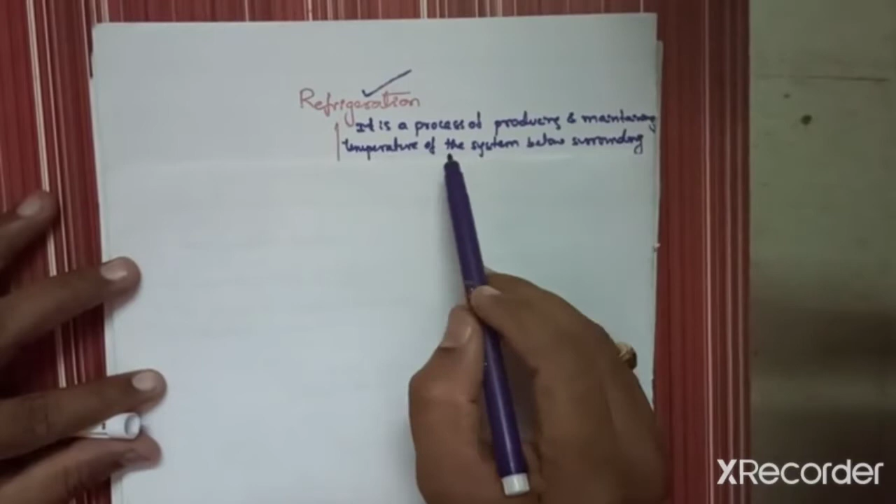That is refrigeration. In air conditioning, that is also a process of producing and maintaining the temperature of the system below the surrounding. But here the quality of air is controlled in air conditioning, and air conditioning not only maintains the temperature below the surrounding, it can increase the temperature above the surrounding, depending upon the condition of the atmospheric air.

And that is the second point. Refrigeration is not for human comfort; air conditioning is for human comfort. That is the difference between these two we discussed in the previous video lectures. So there are two types of refrigeration: one is the air refrigeration system and another one is the vapor refrigeration system.

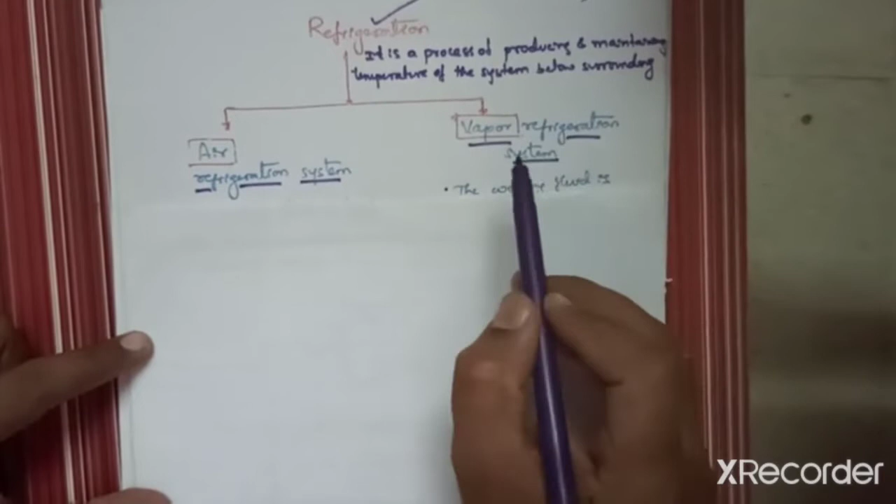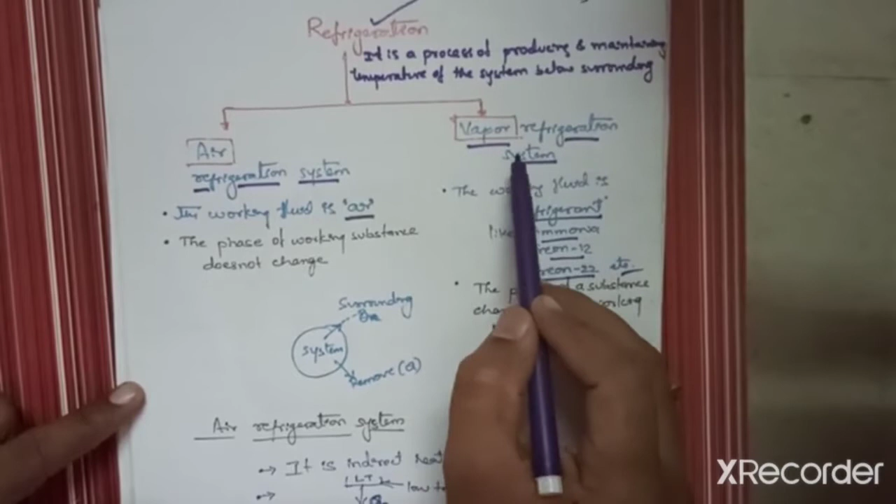The difference between these two is, in the air refrigeration system the working fluid used is air, and in the vapor refrigeration system the working fluid may be different than air, that is called refrigerant. It may be ammonia, Freon 12, Freon 22, dichlorofluoromethane, etc. Different types of refrigerants you can use in the vapor refrigeration system. The vapor refrigeration system you can use in our kitchen and in small scale industries.

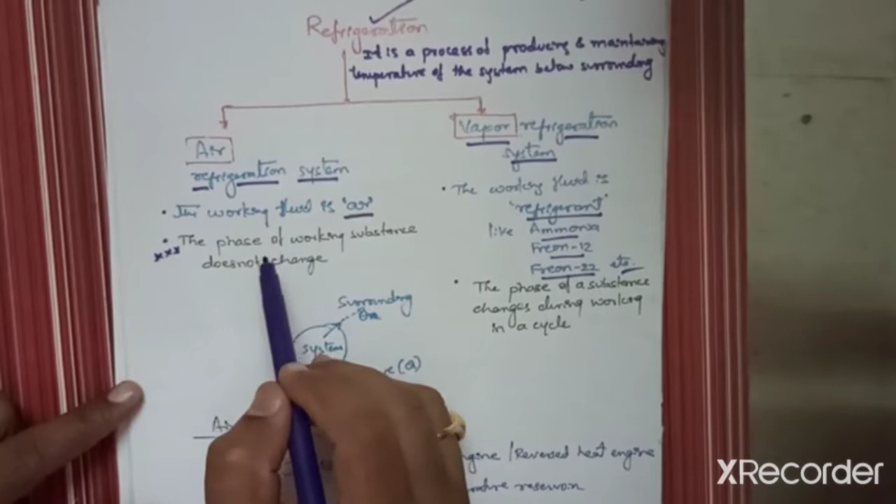The second point is a very important point. The phase of the working substance does not change in the air refrigeration system. Throughout the cycle the working fluid air has the same phase; it will not change from liquid to vapor or vapor to liquid. But in the vapor refrigeration system the phase of the refrigerant changes from one process to another, depending upon the components. So the phase of the substance changes during working in a cycle. That is the second important point.

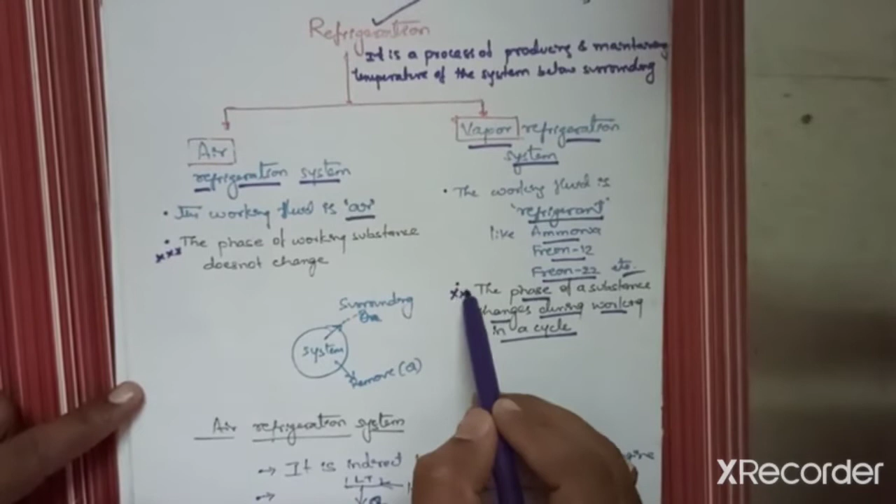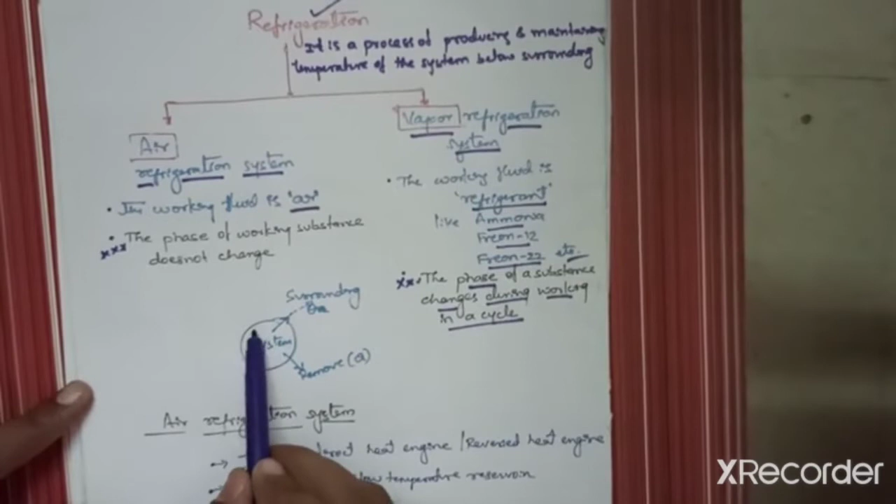So consider one system to understand refrigeration better. The temperature of the system is 30 degrees Celsius and the surrounding temperature is also 30 degrees Celsius. Now I am not comfortable with this system at 30 degrees Celsius; I need to reduce it to 25. So I need to supply some external fluid to the system, and that fluid absorbs heat from the system, or the system is rejecting heat to the surrounding, or in other words the surrounding is absorbing heat.

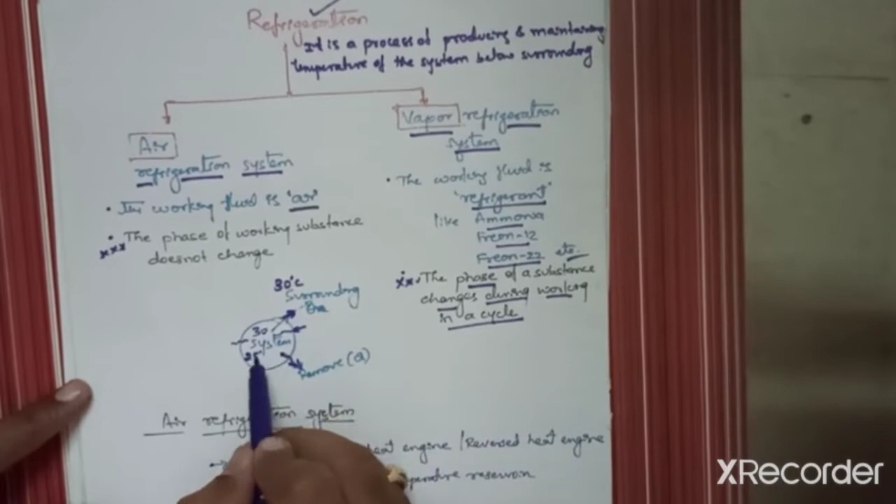When the system rejects heat to the surrounding, slowly the temperature of the system comes down from 30 to 25 degrees Celsius and maintains the same 25 degrees Celsius throughout the day. Then this process is called a refrigeration cycle or refrigeration process. Next we will discuss the air refrigeration system. The air refrigeration system is an indirect heat engine, also called a reversed heat engine.

What is an indirect heat engine? An indirect heat engine, or reversed heat engine, is an engine that absorbs heat from a low temperature reservoir and rejects heat to a high temperature reservoir with the use of some external work. So indirect heat engine absorbs heat from low temperature reservoir and rejects heat to high temperature reservoir with the use of some external work. The same application you can see here.

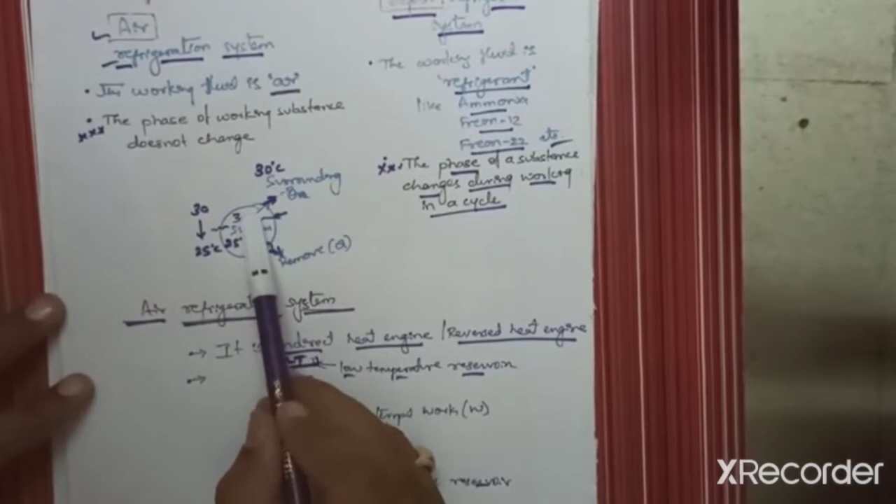Initially the system temperature and the surrounding temperature are the same, 30 and 30 degrees, for example. Now the temperature of the system is gradually decreasing by use of some external work. I am supplying some air or some external fluid, and that fluid absorbs heat from the system and rejects heat to the surrounding, producing and maintaining the low temperature.

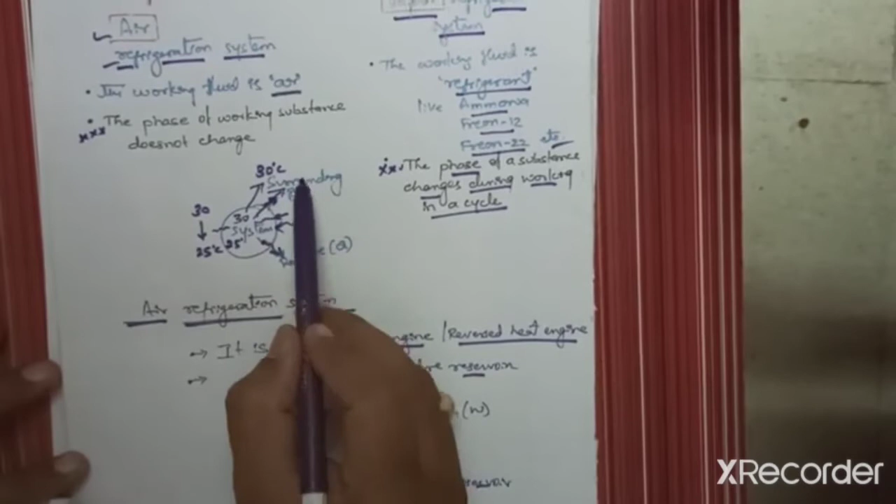So heat is absorbed from low temperature, and heat is rejected to the high temperature surrounding. The surrounding is at high temperature, the system is at low temperature. So that is how the system works. In the next topic we will consider the working of the air refrigeration system.

Okay, here I have taken a new topic, air refrigeration system working on Bell-Coleman cycle. This entire air refrigeration system works on the principle of Bell-Coleman cycle, and it is also called reversed Brayton cycle. Why it is called reverse Brayton cycle, we explained in the previous video lecture in the gas power cycle.

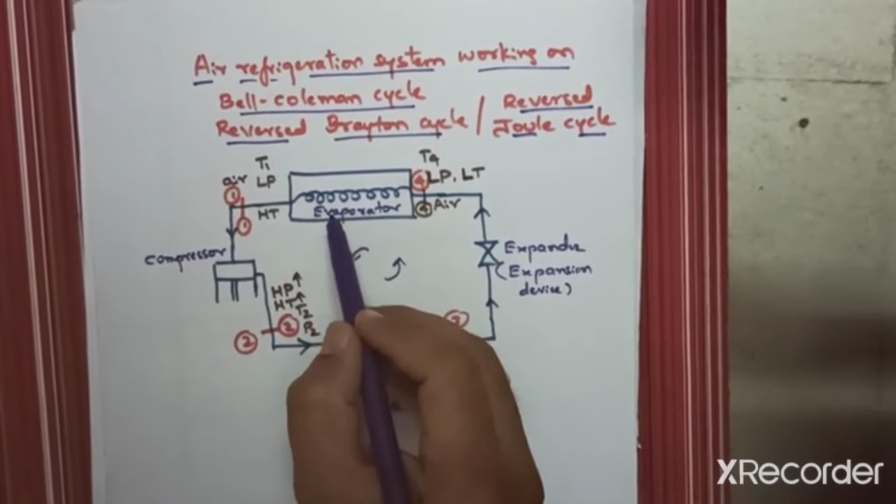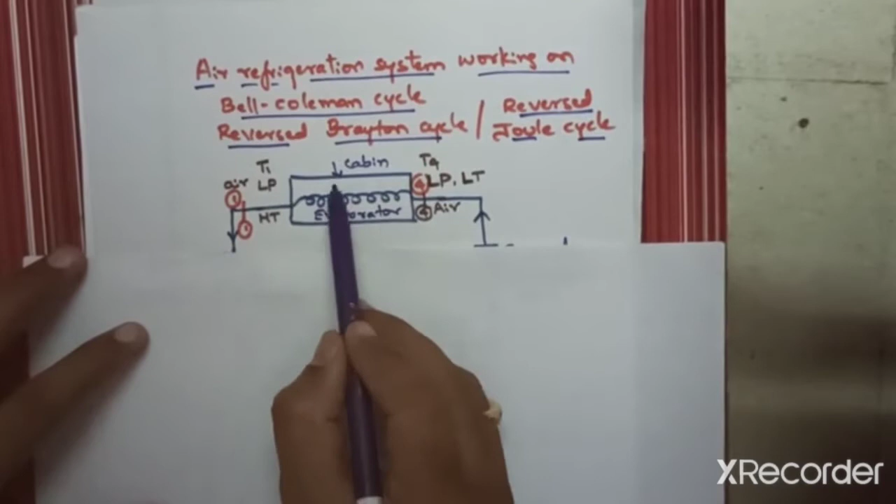Now I will discuss one by one what will happen in the evaporator, the compressor and all. First I will consider one evaporator coil, and here this is the diagram. This evaporator coil is placed in a cabin. Cabin is nothing but where you need to reduce the temperature. For example, you take one room, and inside the room you fix these evaporator coils, where you need to reduce the temperature of the system.

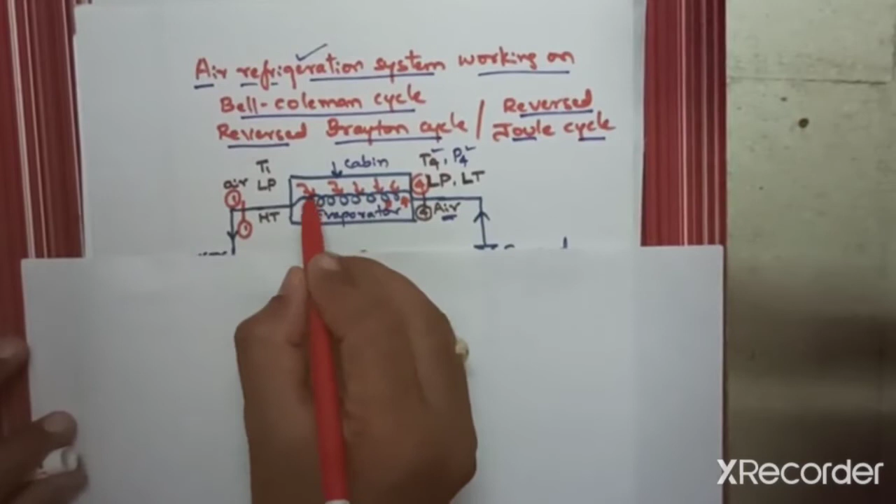Now I will supply air, because it is an air refrigeration system. I will take this as point number 4. The air is at low pressure and low temperature, T4 and P4. I supply air inside the evaporator, and this air, when passed through the evaporator coils, absorbs heat from the room, because the temperature of the air is low and the temperature of the cabin is more.

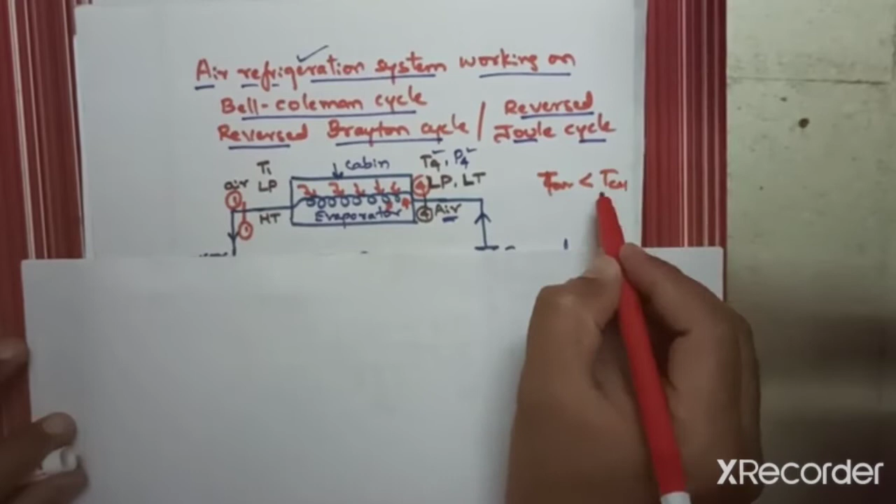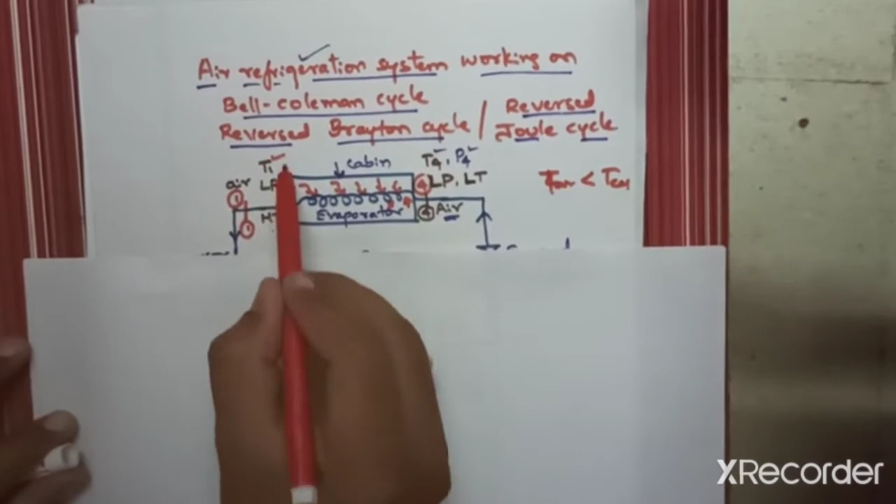There is a difference in temperature. Temperature of air is less than temperature of the cabin. So the air absorbs heat from the room to be cooled and becomes high temperature. Temperature at point 1 I will take as T1, and pressure as P1. During the evaporator, that is called heat addition process. So process 4 to 1 is heat addition process; heat is added to the air.

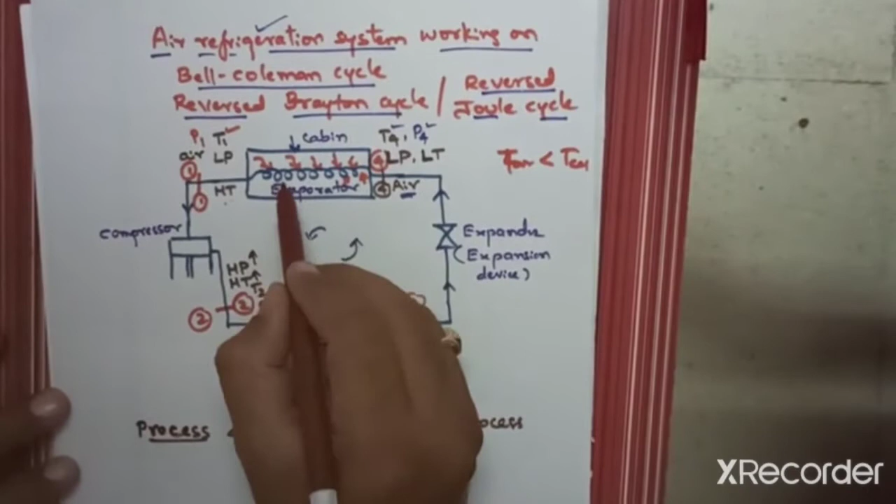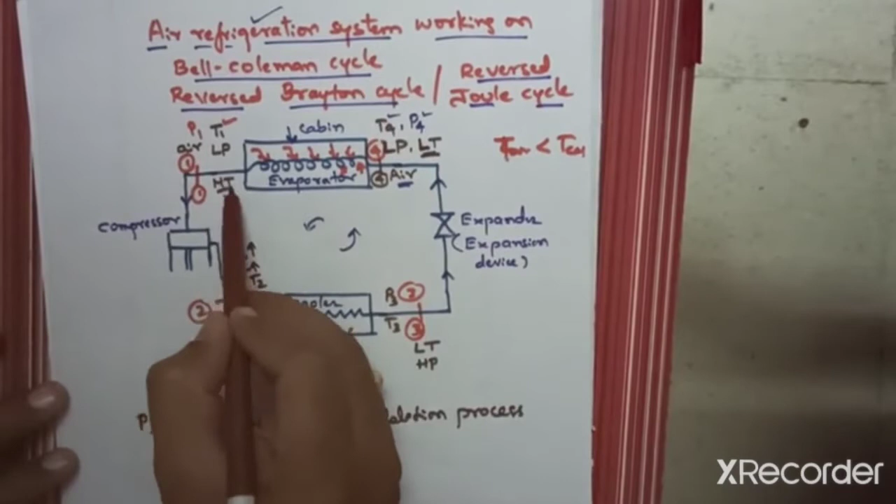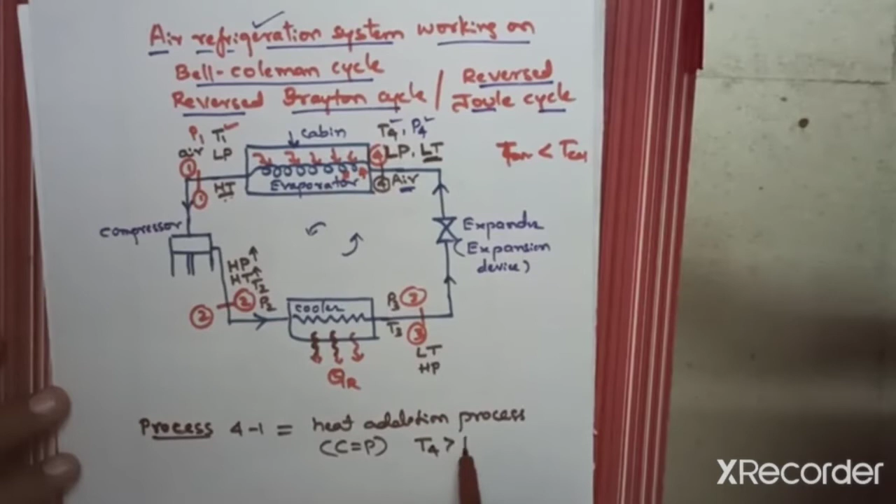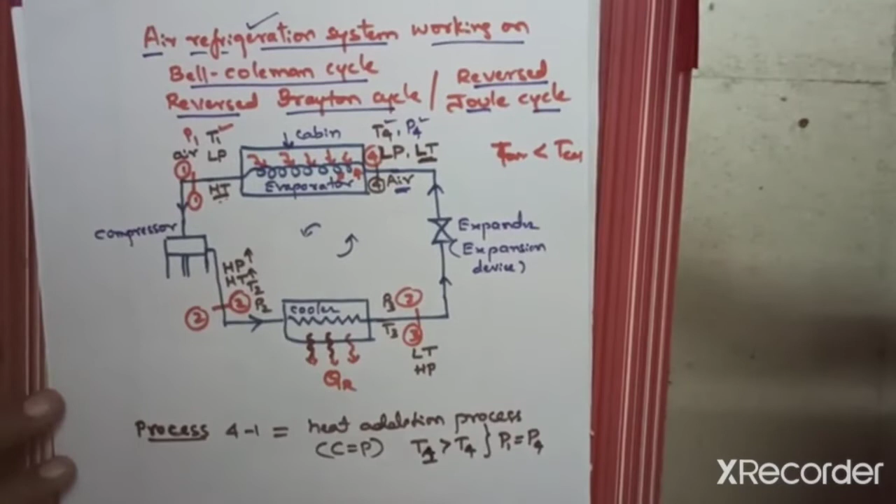During heat addition process, 4 to 1, the pressure is constant, but the temperature is increased, because air absorbed heat from the room. So temperature at point 1 will be greater than at point 4, but pressure P1 is equal to P4. One more point: when the air refrigerant absorbs heat from the space to be cooled, the volume slightly increases, so V1 will be greater than V4. These are the three conditions here.

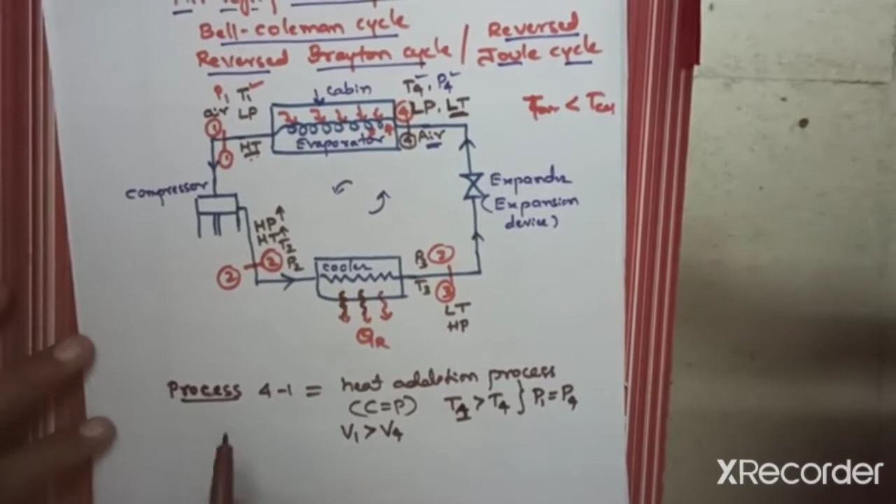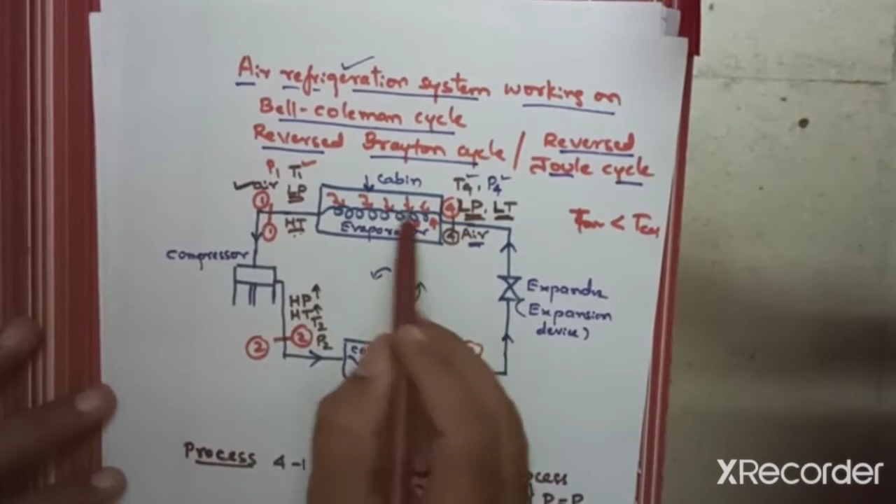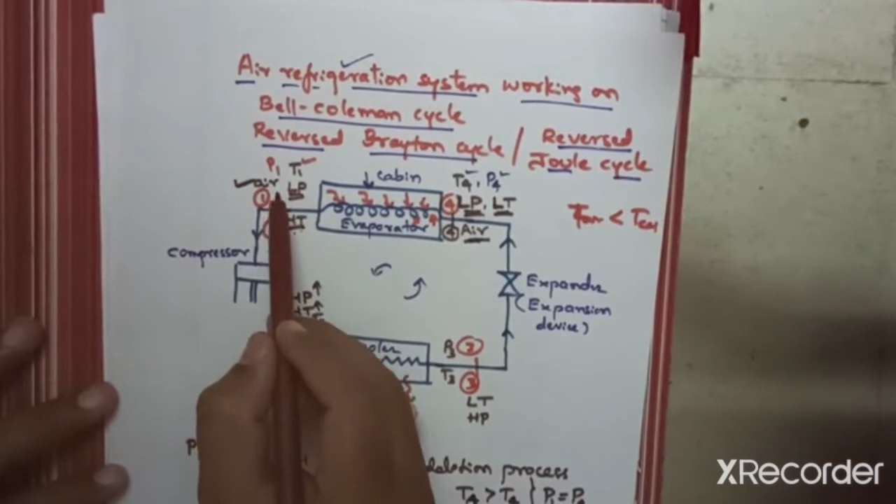Now at point number 1, the air is high temperature and low pressure, because the pressure is constant, same as point number 4. Keep in mind, there is no change in the phase of the substance; here is air, here will be air. That is a fundamental point. This high temperature, low pressure air enters inside the compressor. So why do you need the compressor here?

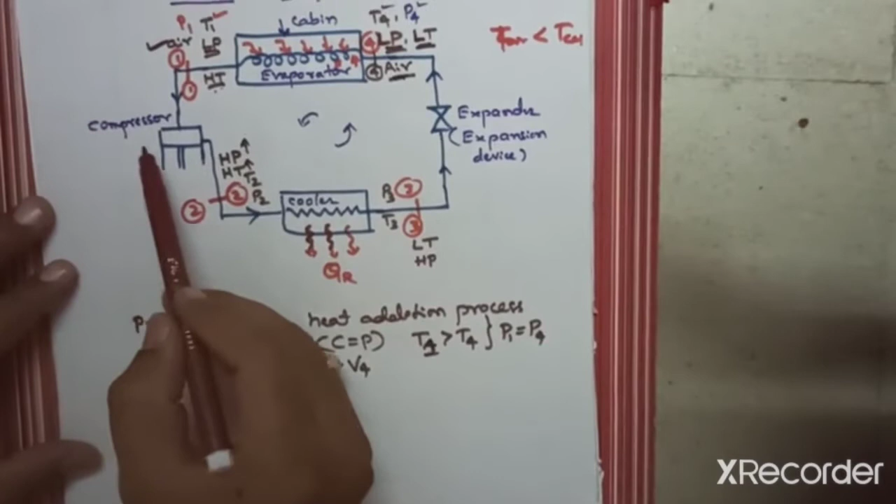As I told you, here the volume of the air is more. If you do not compress this high volume air, it will become very difficult to pump from one place to another place; we would need a larger pipe diameter. So you have to compress it to low volume. Now this high temperature, low pressure air passes to the compressor.

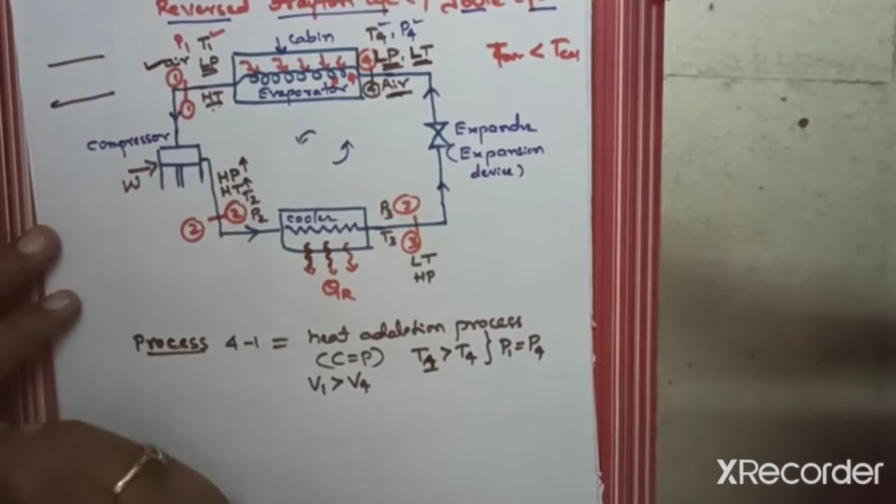In the compressor we are supplying some mechanical work W. Here the air undergoes a compression process, process 1 to 2. What type of compression is it? Isentropic compression, also called reversible adiabatic compression process.

So now during the adiabatic compression, what are the properties that will change here? So here it is high temperature air. During compression, the temperature also increases. Here I have written high temperature and high temperature. That does not mean that the temperature will remain the same. The temperature at point number 2, that is T2, will be more than T1.

Because if you compress any fluid, the pressure increases, at the same time the temperature also increases, but there is a decrease in the volume. Okay, you take a balloon and compress it, the volume of the balloon decreases, but the pressure of the air inside the balloon and temperature also slightly increase. So at point number 2, the pressure is more than P1. So P2 is more than P1, and temperature at point number 2 is also more than T1.

So that is the reason we have written here, low pressure will become high pressure after compression, and there will be a slight change in the temperature of the air. Now this high pressure, high temperature air passes to the cooler or heat exchanger. This cooler or heat exchanger will be fixed outside the room. I have taken this as the cabin. My cabin itself is the room, and this cooler will be fixed outside the room, and heat is rejected to the surrounding. This is the surrounding, this is the system.

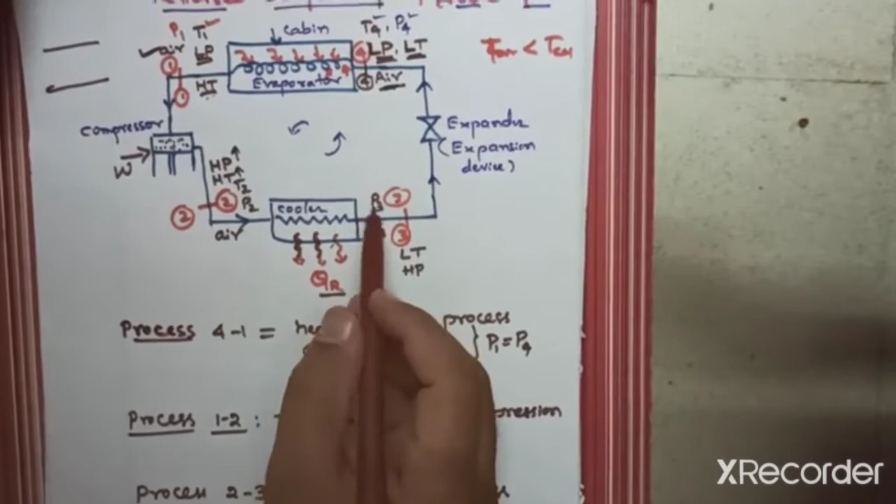So during the 2 to 3 process, heat rejection takes place. So I will write here process 2 to 3, heat rejection process. Okay. During 2 to 3, again the pressure remains constant. That is a fundamental concept of the Bell-Coleman cycle. So I will write P2 is equal to P3 because during the 2 to 3 heat rejection process, the pressure remains constant.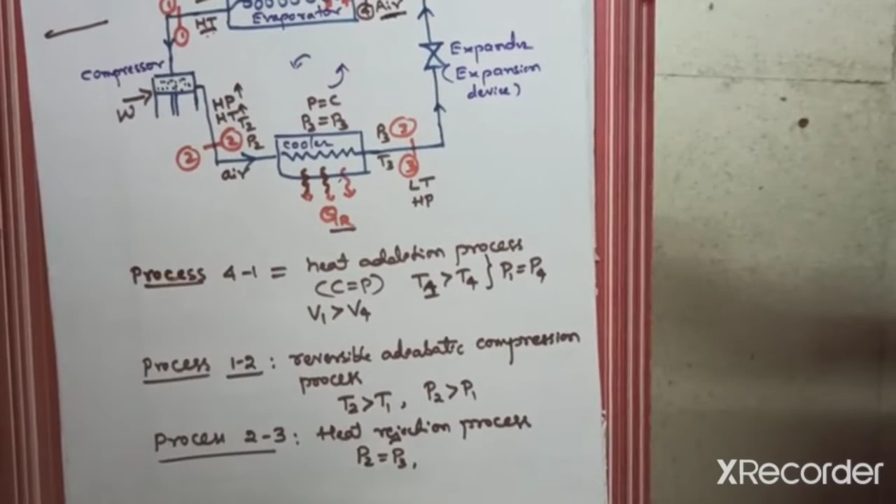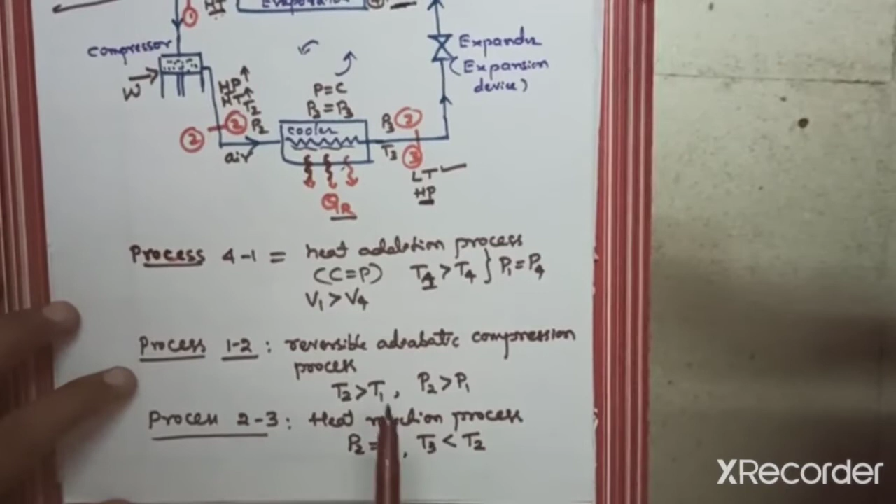Now you can ask a question, what about the temperature? When high temperature air releases its heat to the surrounding, the high temperature air becomes low temperature. So here is low temperature, but the pressure will remain the same. So at point number 3, the temperature is less. T3 is less than T2. So these are the two properties that change. The volume of the air will remain the same because we are not compressing and we are not expanding here.

Now this low temperature and high pressure air will be supplied to the expander or expansion device. Examples of expansion devices are the solenoid valve and the capillary tube. So when the low temperature and high pressure air expands inside the expander, the high pressure air will become low pressure air. That is what we have taken initially at point number 4.

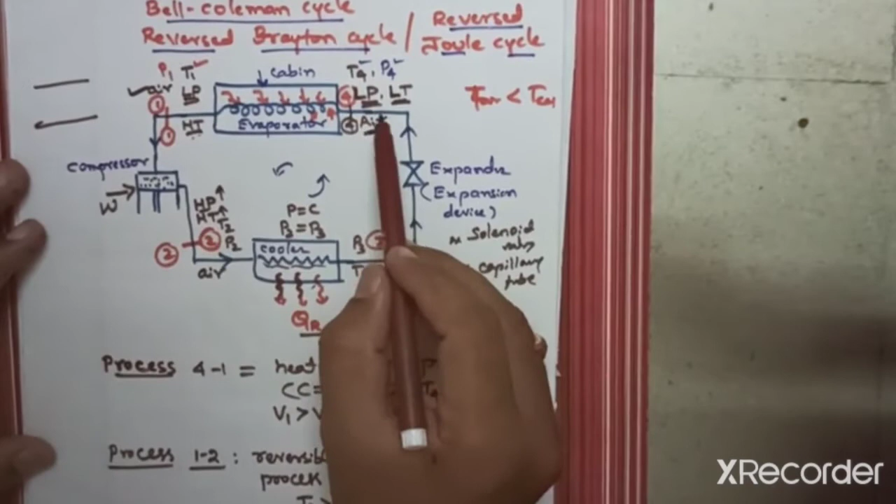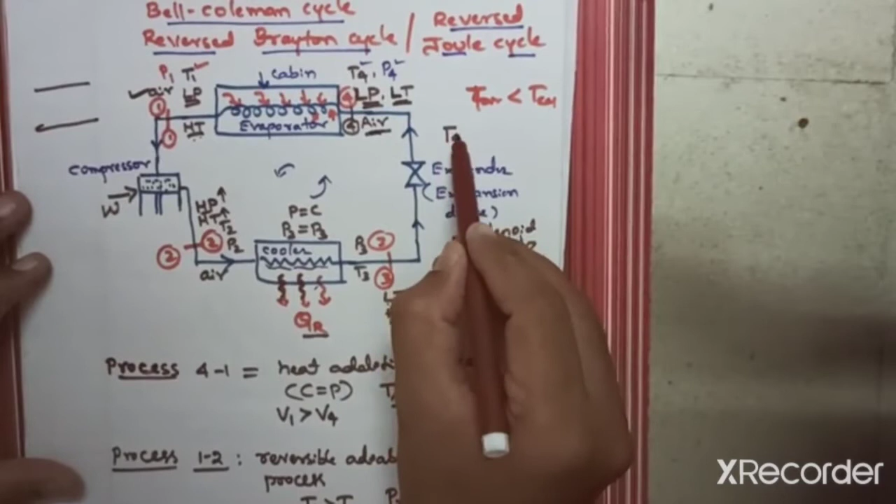Now the cycle is closed. Here it is low temperature, and here also low temperature. Due to expansion of the air inside the expander, the temperature also decreases. Dear friends, don't confuse that because both are low temperature, the temperature remains constant. No, it's not like that. Temperature at point number 4 will still be less than temperature at point number 3, because during the expansion process 3 to 4, pressure as well as temperature of the air decreases.

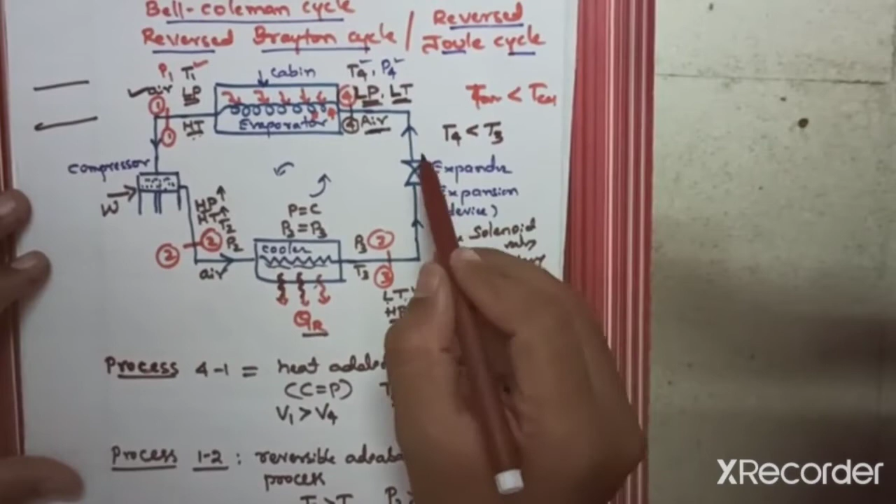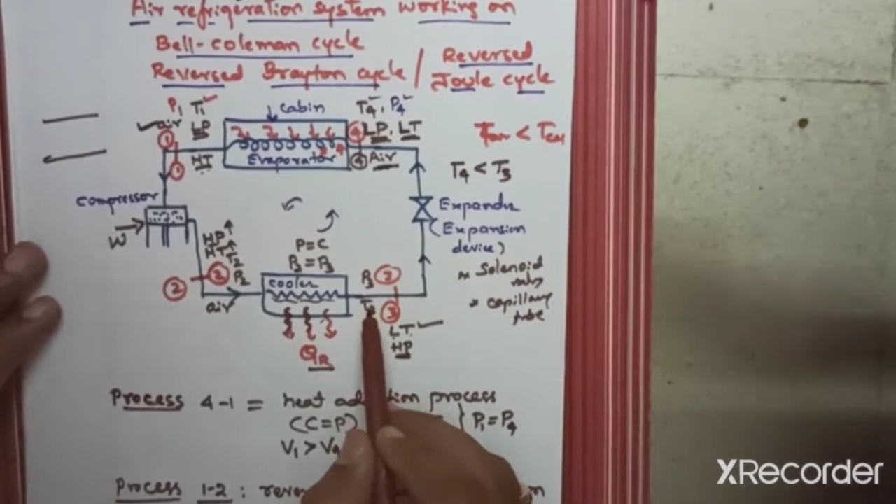I will write here the last process, 3 to 4. What type of expansion is it? It is a reversible adiabatic expansion process. So what are the changes in properties here? Due to expansion, pressure at point number 4 will be less than P3. P3 will be more than P4. At the same time, temperature at point number 3 will be greater than at point number 4, or T4 will be less than T3.

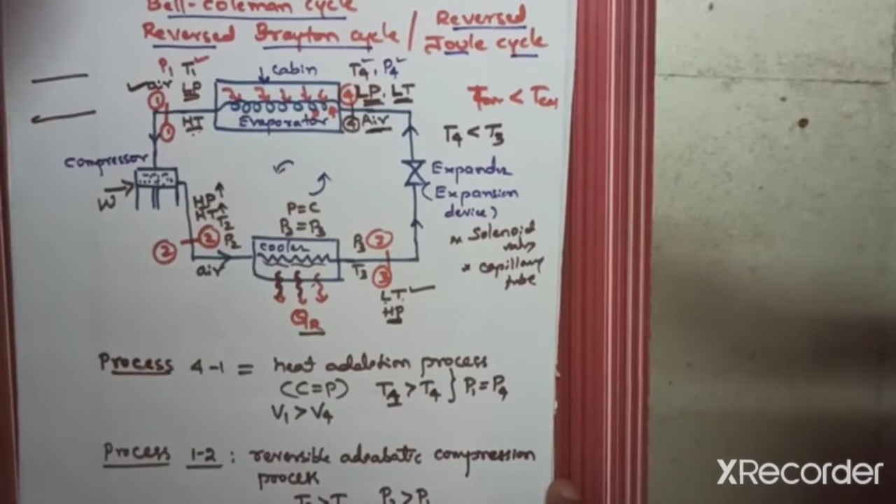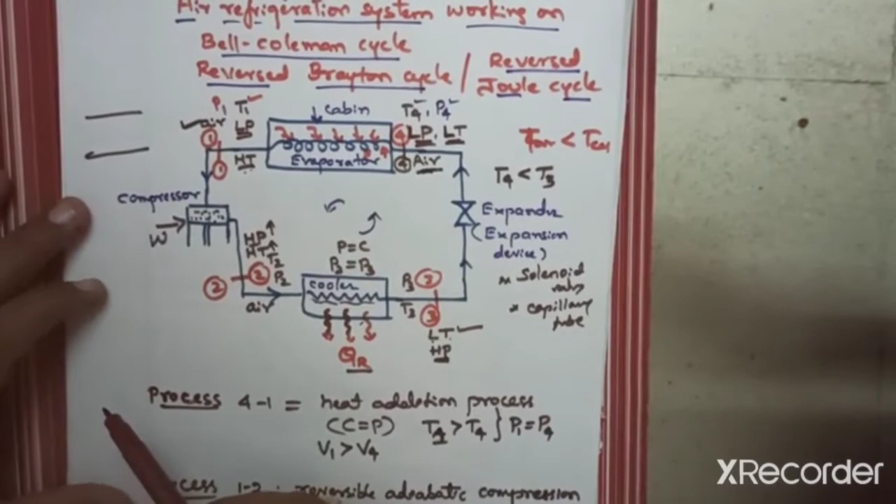So this is the working principle of the Bell-Coleman cycle or reverse Brayton cycle. So what are the major points to remember? The Bell-Coleman or reverse Brayton or reverse Joule cycle consists of 4 major components: evaporator, compressor, heat exchanger or cooler, and expander. That is the first point. The second point is it is a reversed heat engine. As we told, why is it a reversed heat engine?

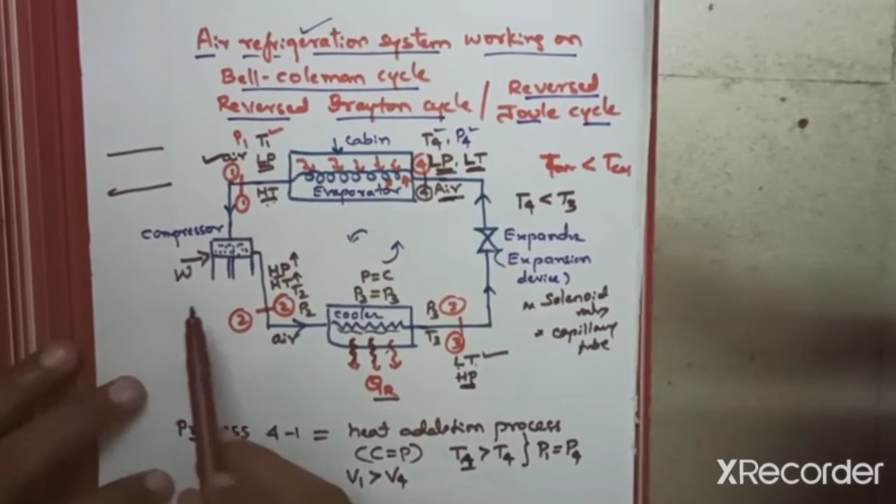It absorbs heat from a low temperature system and rejects it to high temperature with the use of some external work. I am supplying some work here. That is a simple sketch I can draw here. This is an engine, a reversed engine. It absorbs heat from the low temperature reservoir and rejects heat to high temperature with the use of some external work. So this is external work I am supplying here, absorbing heat from low temperature, rejecting heat to the surroundings.

So the third point is, we can explain the working principle. Here initially I will take air as the working fluid. The air will initially be low pressure, low temperature. The low pressure, low temperature air enters the cabin or evaporator, absorbs heat, and becomes high temperature. The volume of the air also increases compared to this point, and the important point is that pressure remains constant during the process. So it is low pressure compared to here.

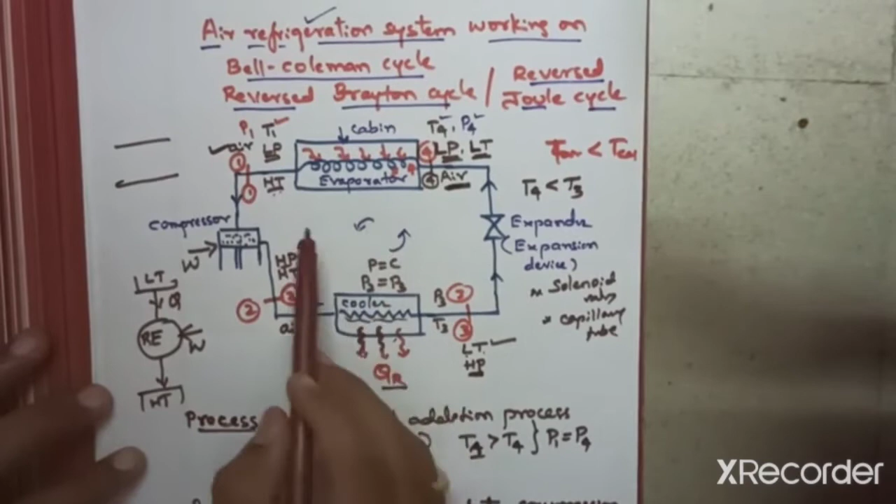Here temperature is more, and pressure will be more because we have used the compressor. Because of the compressor, pressure is more in this line compared to this line. Because the air absorbed heat, it is now at high temperature but the pressure is the same. So high temperature, low pressure air, refrigerant or air fluid, is supplied to the compressor.

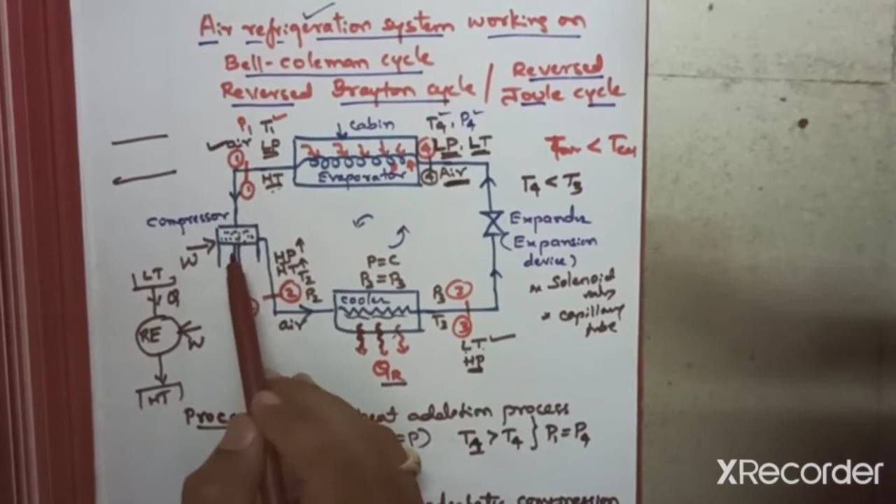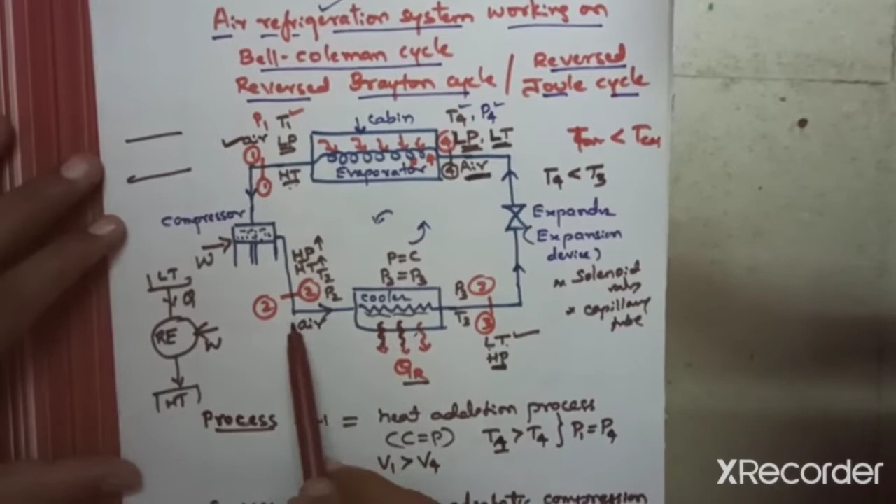Here compression takes place. So what type of compression is it? A reversible adiabatic compression process. At the end of the compression process, the temperature and pressure of the air will be more. That's the reason I call it high pressure, high temperature. This high pressure, high temperature air is supplied to the cooler. Here the difference in temperature between the air and the cooler is more, so the air rejects heat to the surroundings, to the atmosphere.

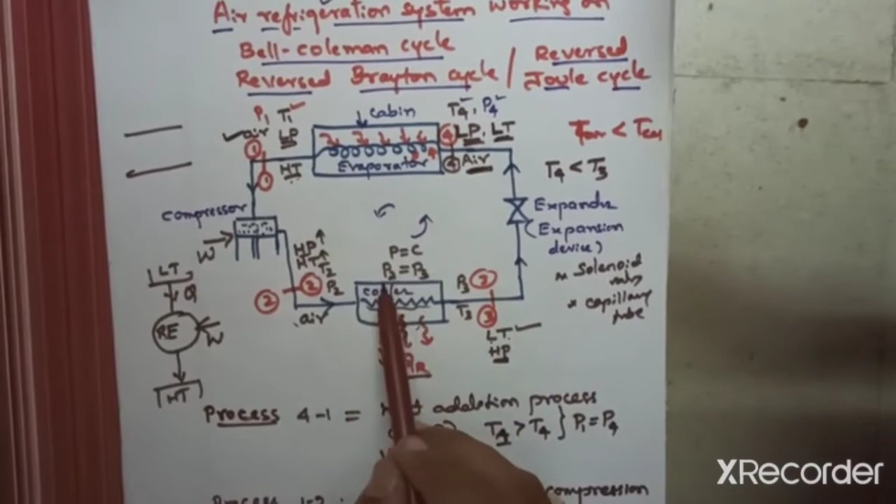But during the cooling process, the pressure remains constant. That is, P3 is equal to P2. Due to compression, the volume of the air decreases. Volume at point number 2 will be less compared to volume at point number 1. That is, V2 will be less than V1. So that process is called the isentropic compression process.

Process 2 to 3 is the heat rejection process. During heat rejection, pressure remains constant. At the end of the heat rejection process, the temperature will become less. Here it is high temperature; it will become low temperature air, but pressure remains constant. So now low temperature, high pressure air needs to be supplied to the expansion device. We can ask a question: why do you need to send it to the expander? We could send it directly here.

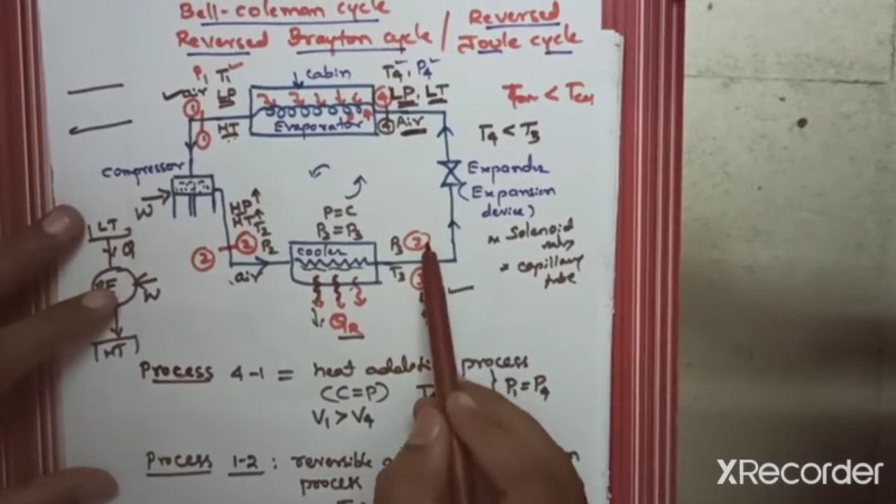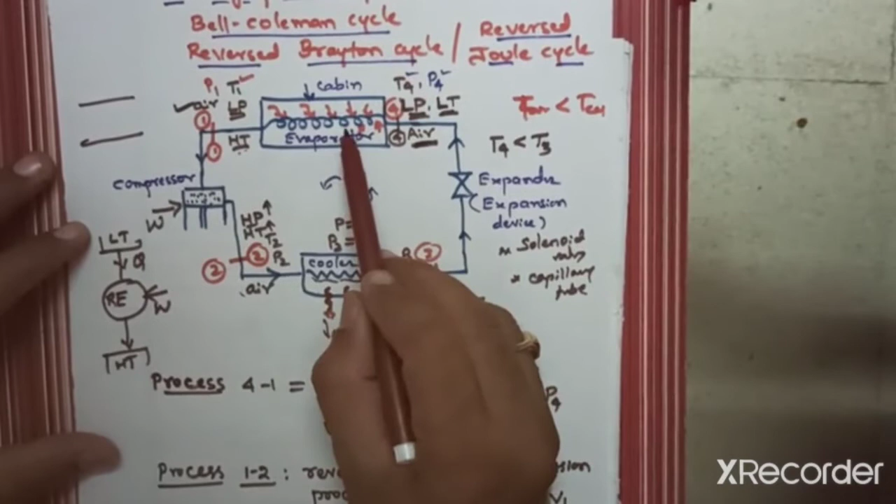We cannot supply this high pressure, low temperature air directly to the evaporator. The reason is, it is at high pressure. If you supply it directly to the evaporator, the pressure will remain the same. This high pressure air will pass to the compressor, and again the pressure will become much greater than the initial pressure. So we have to reduce this pressure. The high pressure should become low pressure. Then low pressure refrigerant or air will go to the cabin, and if you use the compressor, there will not be much increase in the pressure. There is no damage to the cycle.

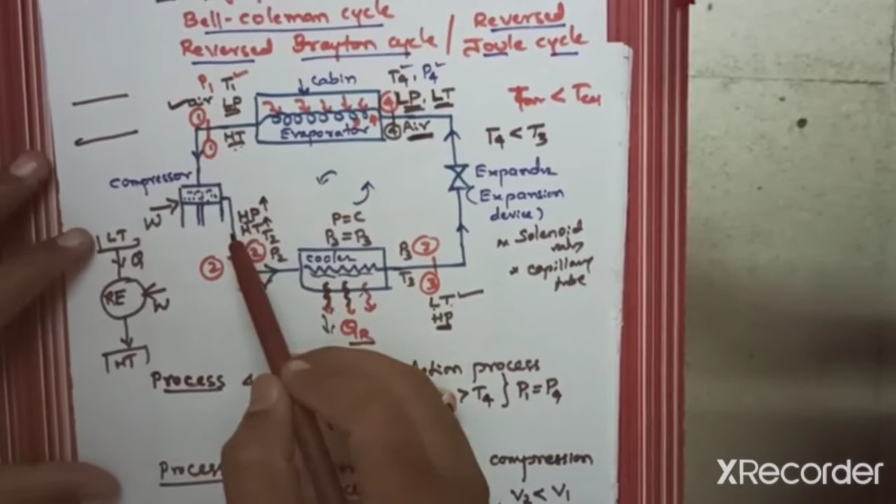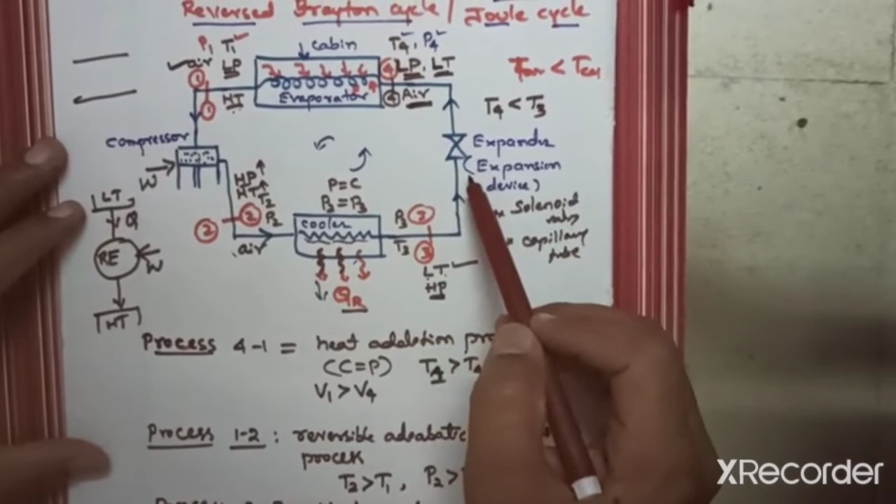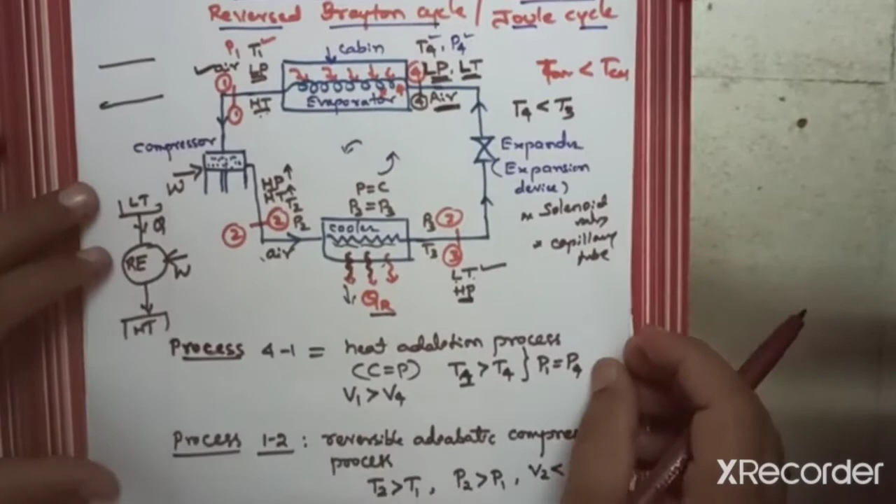So these are the 4 processes we have listed here. Process 4 to 1, the heat addition process. These are the changes we have written. The last process is process 3 to 4, the reversible adiabatic expansion process. Due to expansion, the temperature decreases as well as the pressure. So this is the working principle of a reversed Brayton cycle or Bell-Coleman cycle. You can ask how we will calculate the performance of this engine. It will be calculated using a parameter called the coefficient of performance, COP.

So we will draw the PV and TS diagrams for this cycle, pressure versus volume and temperature versus entropy, for all 4 processes. Here I have taken pressure and volume, temperature and entropy diagrams. The first process is what? Process 4 to 1. I have taken it as the first process, the heat addition process. Heat addition in the cabin, that is the evaporator space, is a constant pressure process. So first I will draw one constant pressure process, that is 4 to 1.

During 4 to 1 the temperature increases. Temperature will be represented on the TS diagram, which we will discuss while plotting temperature versus entropy. So during heat addition 4 to 1, P1 is equal to P4. I would write here P1 is equal to P4.

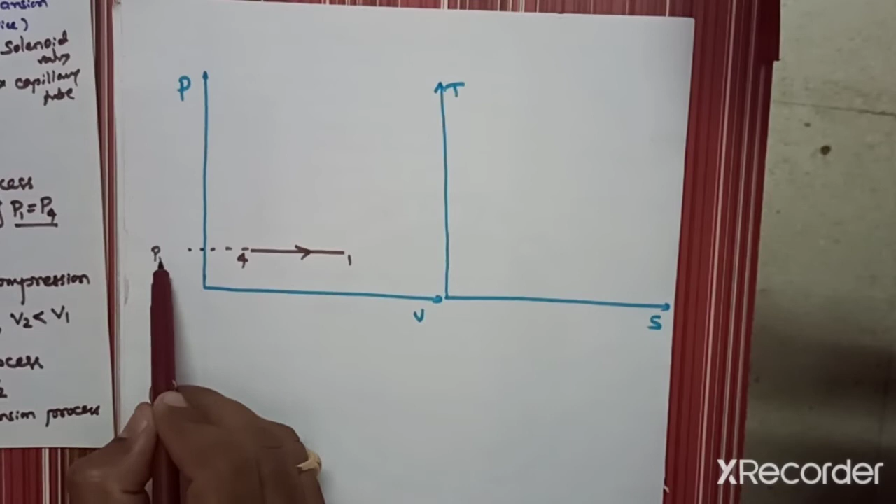The second process is the reversible adiabatic compression process, during which the temperature increases, the pressure also increases, and the volume should decrease. So I will represent 1 to 2 with decreasing volume. I will start from point number 1. Volume should decrease as well as the pressure should increase.

So here it is 1 to 2. Here volume is V2 at point number 2 and pressure is P2. So pressure increases, volume decreases. So here what type of process is it? It is called reversible adiabatic process. Reversible adiabatic compression process. Here it is a heat addition process. Heat addition.

This is heat addition. So now the third process. What is the name of the third process? Process 2 to 3, heat rejection process. So during heat rejection process, again the pressure is constant during the process. So I will represent it with one horizontal line. Constant pressure process, arrow mark is towards left, because during the cooling process, the high volume, again there is chance of condensing here, so volume is decreasing.

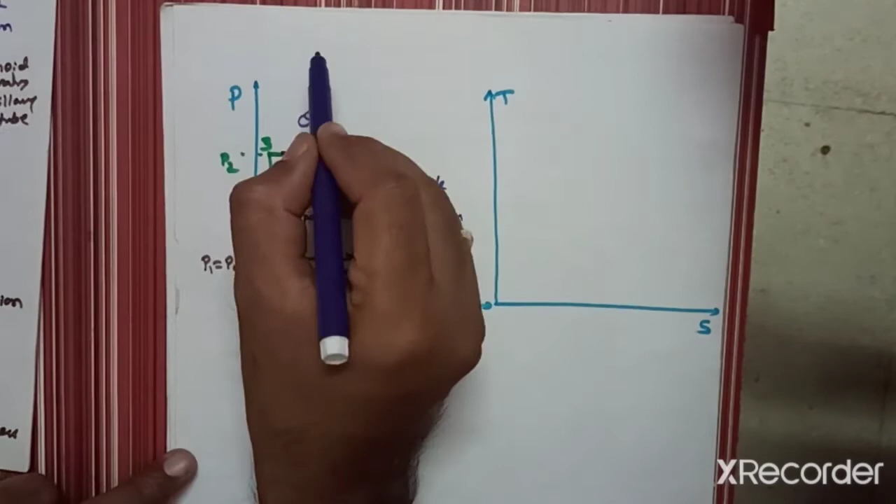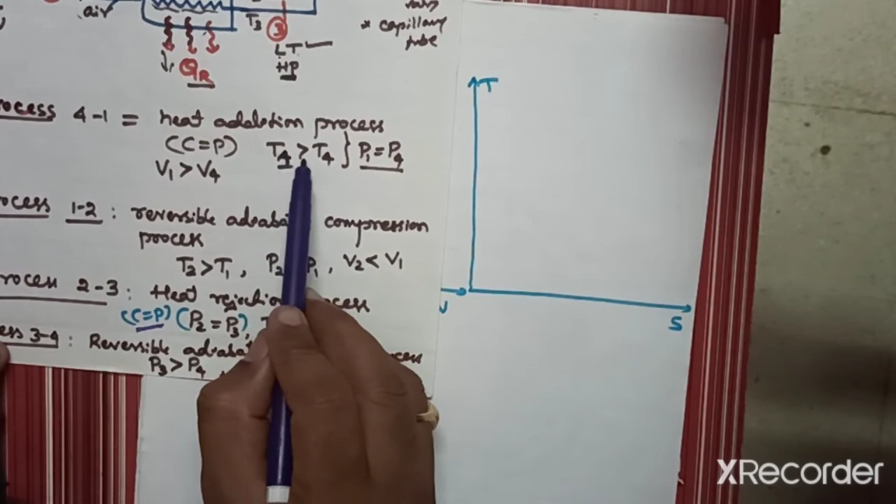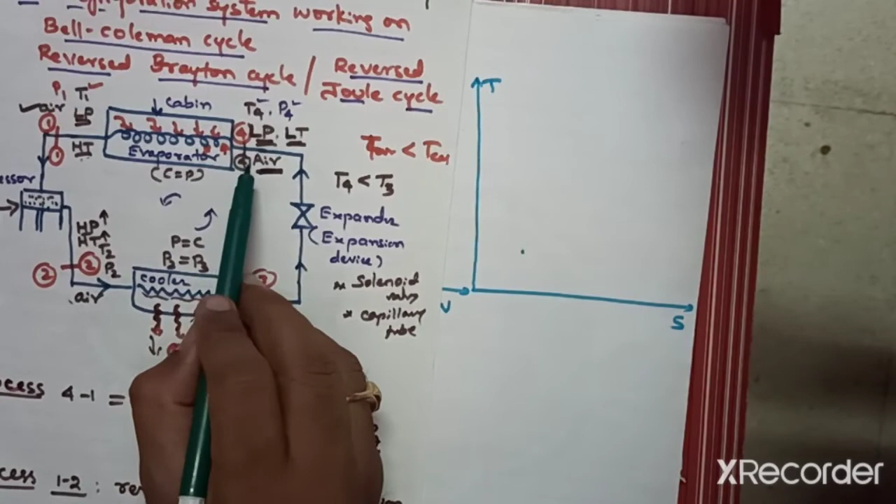Now we will draw the TS diagram simultaneously. Here TS diagram, first process 4 to 1. So I will start from 4 to 1. So heat addition process. During heat addition, the temperature will be more than T4. The outlet of the evaporator temperature will become more than T4. So I need to increase the temperature from 4 to 1. This is point number 4, the starting point. So this air is entering into the evaporator, increasing the temperature at outlet. So 4 to 1 is increasing.

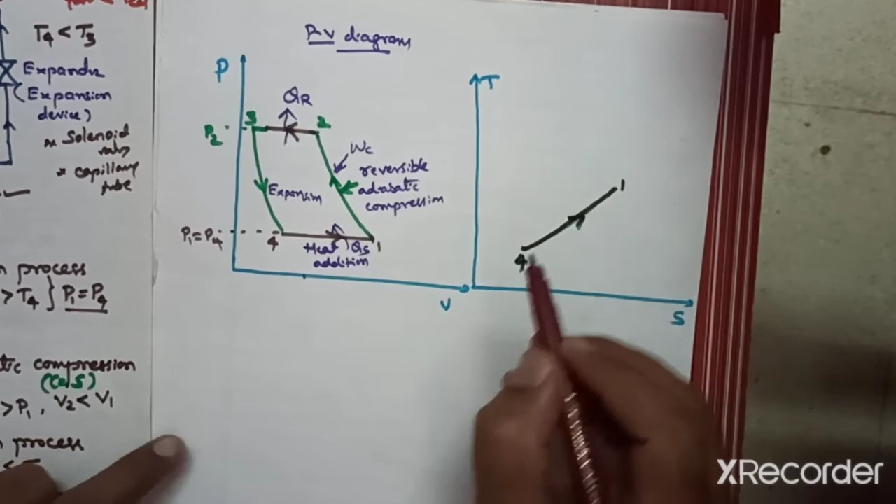Next, second process, 1 to 2, reversible adiabatic compression. Reversible adiabatic compression is also called isentropic process. So entropy remains constant. So for 1 to 2, you have to draw one vertical line. Here I will take this with this color pencil. 4 to 1. So now during 1 to 2, entropy S remains constant. S1 is equal to S2.

Now during the third process, what is the name of the third process? Heat rejection process. Again it is at constant pressure. So the constant pressure process will be represented by a curved line, just like 4 to 1. But here temperature should decrease. In the 4 to 1 heat addition, heat supplied, temperature increases. Here it is T4, and after the end of the heat addition, temperature is T1. T1 is greater than T4. But during the heat rejection process, the temperature should decrease. So I will represent it with a downward arrow mark.

Okay. Now here I will write it as heat rejection. So during heat rejection process, initial temperature is T2, it is more. At the end of the process, it will become less. I will take 2 to 3. Again the fourth process is isentropic expansion. Then I will join this line. So 1 to 2, 2 to 3, 3 to 4. So this is the representation of Bell-Coleman cycle on TS diagram.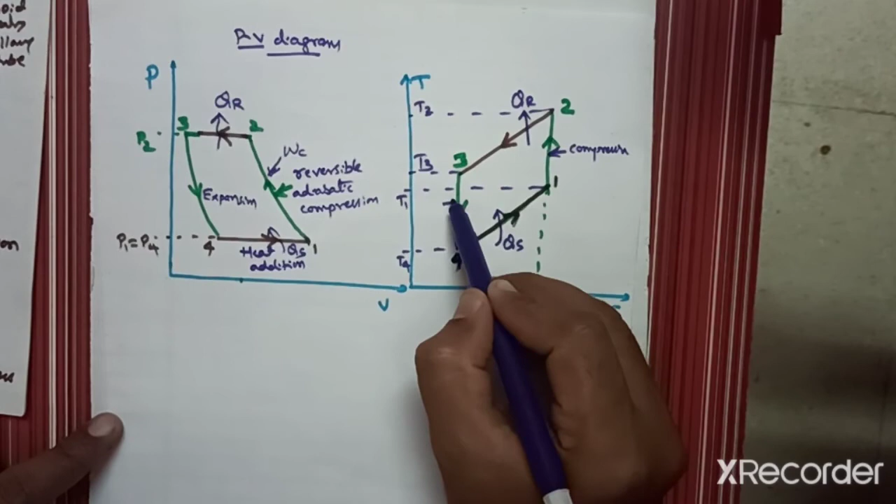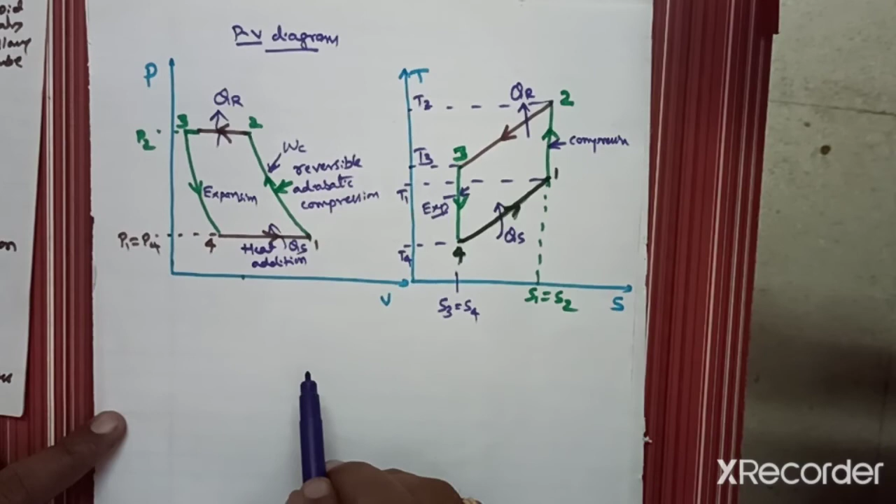Here I will write it is compression process. What is 3 to 4? Expansion process. So during 3 to 4, again entropy remains constant, S3 is equal to S4. So highest temperature is T2 and the lowest temperature is T4.

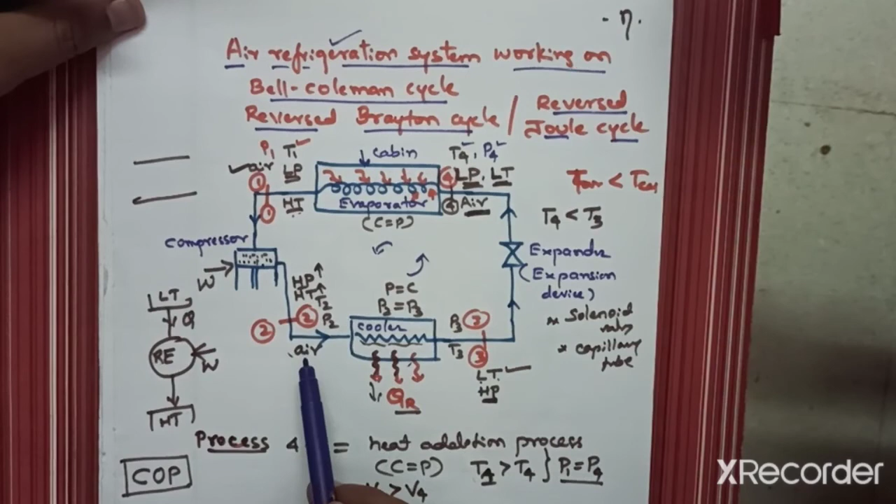So in the exam, how will the question be asked? Explain the working principle of air refrigeration or Bell-Coleman cycle or reversed Brayton cycle with PV and TS diagram. So you have to draw this diagram, explain with some sentences, represent these four processes, and draw this PV diagram. In the next video lectures we will derive an expression for COP of Bell-Coleman cycle.